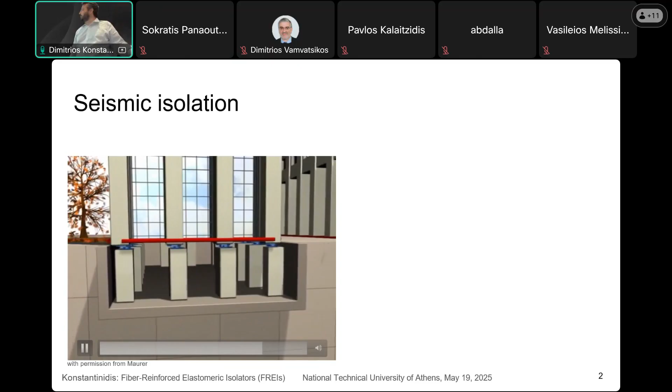So seismic isolation basically concentrates the deformations in the isolation layer, where you can use specially designed devices that can handle very large deformations or sliding.

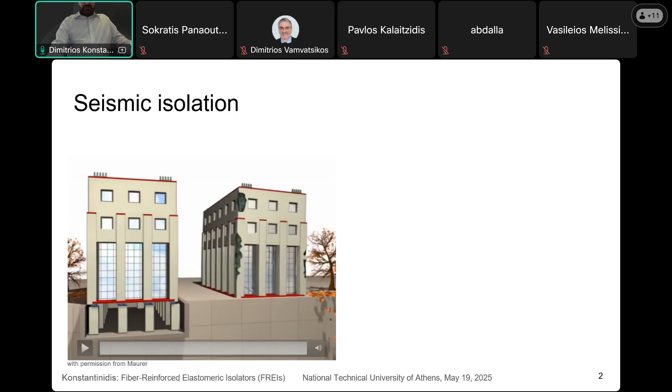Now, from the point of earthquake engineering, if you look at the response spectrum, essentially introducing that horizontally flexible layer increases the fundamental period of your structure. It also increases damping a little bit, but that's a secondary thing. Sometimes I hear people calling isolators dampers. They're not dampers. Seismic isolation is a different thing. Damping is an additional, extra, secondary thing, but it's not essential.

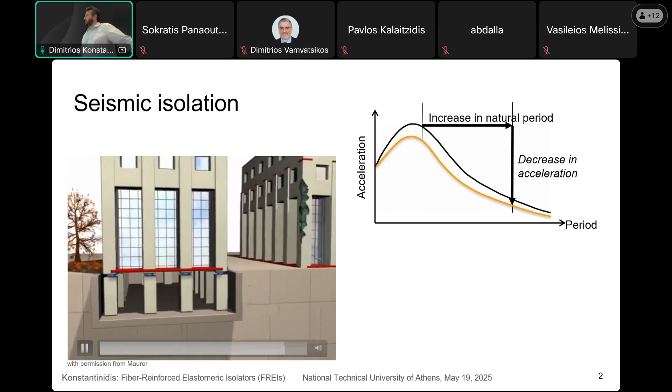Now, all this, of course, happens at the expense of increased displacements, but those displacements are again concentrated at one location where you can deal with them, as opposed to having them distributed throughout the structure and causing damage.

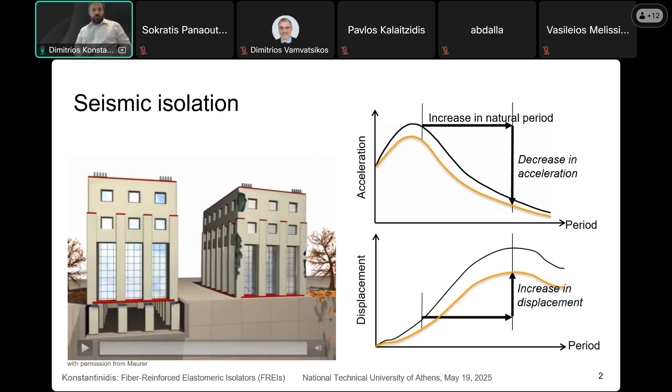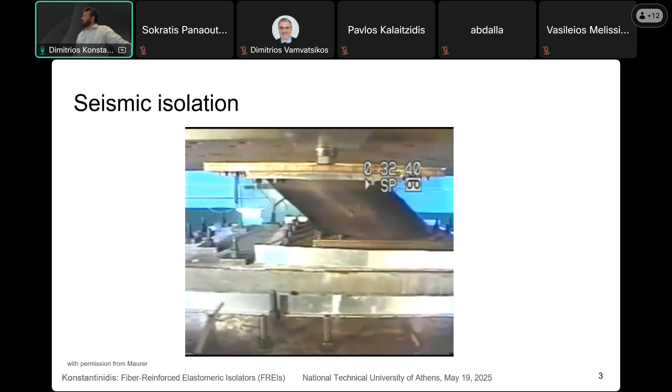Now, this is again part of the introduction. This is just a video of a seismic isolator, I think this is a lead rubber bearing. I just want to give people an idea of how much seismic isolators deform. This is a test at UC San Diego, and you see the deformations here in the order of about 300%, I believe. So 300% means that the lateral displacement is 3 times the total height of the rubber.

Now, could steel structures do that? Could reinforced concrete structures do that? No. All right.

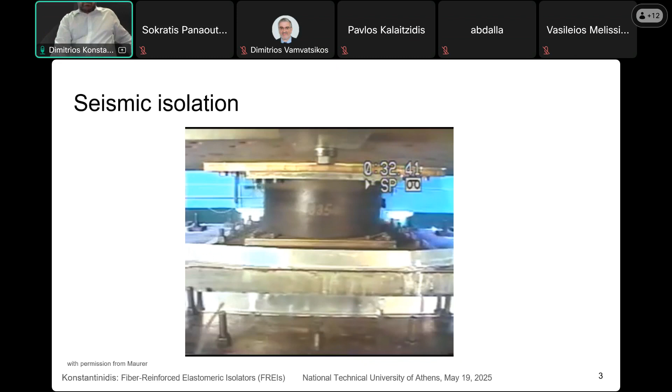Now, I want to talk a little bit about elastomeric isolators, because that is the focus of my research, has been for many, many years. This is the anatomy of a rubber bearing. If you look at it inside, it consists of layers of rubber and steel plates, thin steel plates, sometimes called shims. Then at the top and bottom of the bearing, you have these thicker steel plates that are used to connect the isolator to the superstructure and substructure.

And I'm going to talk a little bit more about that.

The issue with conventional steel reinforced bearings is that they have a lot of steel. Because steel is quite dense compared to rubber, you end up having a device that weighs in the order of 0.75 tons, sometimes up to 1.5 to 2 tons. So they're quite heavy.

Now the concern with the weight is not so much the behavior during an earthquake, but it's the construction. If you have a device that weighs a ton or more, and you want to implement it in a low-cost isolation setting, maybe in a developing country, you would need lifting equipment. But you most likely can't afford lifting equipment. So that already limits your options.

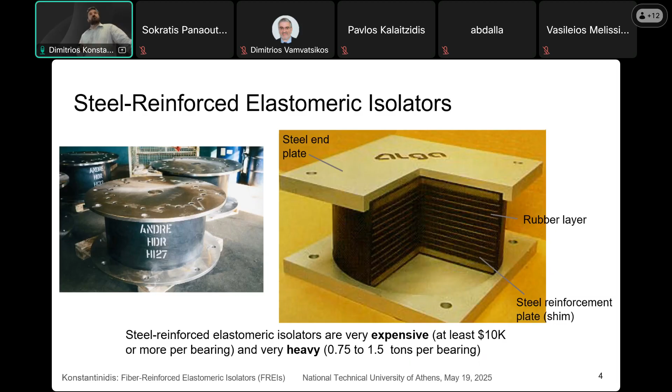So significant cost. The goal of this research in fiber reinforced elastomeric isolators is to find a way to reduce these costs. The idea behind FREIs is first to replace the steel reinforcing plates, the shims, with carbon fiber mesh, which is very light and relatively cheap in most places. Then the goal is also to eliminate the top and bottom steel end plates, which tend to be thick, typically around 3 centimeters, adding a lot of weight and cost. So we eliminate those, and there are certain implications associated with that, which I'll talk about.

The other nice thing is that you could take these bearings and manufacture them in a big sheet, a very large mat, and then just cut them to size according to your desired specifications. You can't really do that easily with steel reinforced bearings.

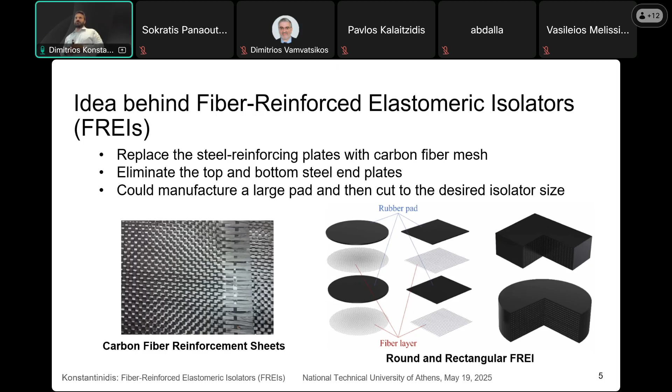So in terms of savings in weight, just going back to what I was saying earlier, for a steel reinforced elastomeric isolator, you would have to use lifting equipment, which already eliminates your options in a lot of low-cost developing world settings. On the right, fiber reinforced elastomeric isolators are so light that you can just pick them up. So the lifting equipment here on the right is Professor Jim Kelly, the father of seismic isolation.

And that's all it takes: a construction worker takes the isolator, places it where it's supposed to be, and you proceed from there.

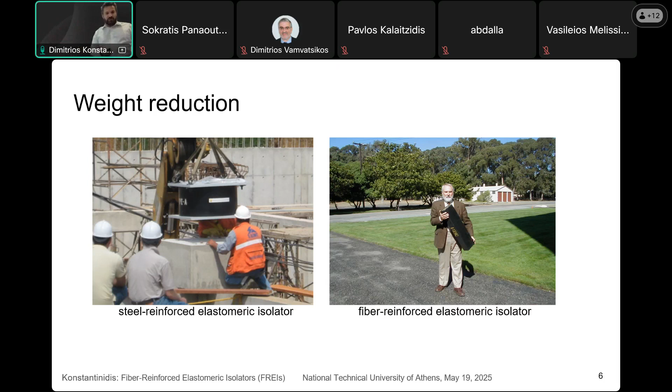Now, what are the implications of these changes we've introduced? I want to talk a little bit about the backbone behavior of elastomeric isolators. On the left, I have a conventional isolator that is anchored to the top and bottom, to the superstructure and the substructure, using anchors. Sometimes we call this configuration bonded.

That is in contrast to what we have on the right, which is a low-cost application where the isolator is just put in place, with no anchors in this case. It relies on friction to transfer the shear forces. Now this is something that has been contested over the years—how can you rely on friction? But I'll come back to that again later.

We have shake table tests that show it actually works pretty well. For a conventional isolator, assuming there are no P-delta effects—let's put those aside for now—if you shear it, what you get is just a line. It's just a spring.

Whereas for an unbonded fiber reinforced elastomeric isolator, as you start shearing it, the top and bottom corners roll off the supports, so you start losing some effective shear area. That reduction in shear area results in this softening behavior. As you keep shearing the isolator, eventually this face, which was originally vertical, becomes horizontal—we call that full rollover. And you can still keep shearing these bearings without them sliding if they're fiber reinforced elastomeric isolators.

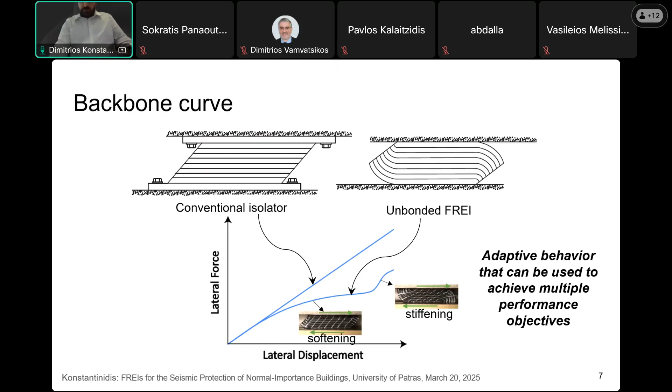So, to summarize things for now, there are various advantages behind FREIs. One is the business of the rollover effect, and you can get adaptive behavior.

Now, there is another very important implication behind this rollover deformation: when you allow the bearing to roll off the supports, you alleviate the high tensile stresses that would develop normally at these corners if these were bonded to the top and bottom, as they are in conventional isolators. It's these high tensile stresses that result in this very expensive manufacturing process. So if you don't have these high tensile stresses, you don't need such a fancy manufacturing process, and you can make these bearings for a small fraction, less than an order of magnitude. We're talking about a bearing like this being in the hundreds of dollars versus 10,000 or 20,000.

And that's for rubber bearings. Let's not talk about sliding bearings. Just as a parenthesis, I was involved recently in an evaluation of a hospital in San Francisco that was to exhibit very large displacement, 52 inches. 52 inches is something like 1.3 meters. You cannot achieve that with elastomeric bearings; you need to go to sliding bearings. But the cost of the devices was $75,000 each.

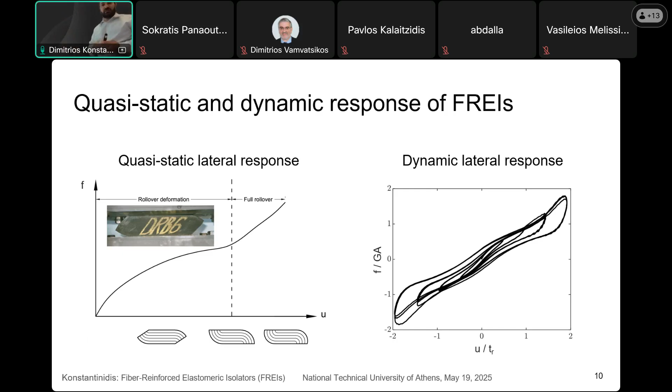The other thing that is noteworthy here is that the unloading stiffness is also a function of displacement. If you look at the stiffness, let's say over here versus here, that also varies with displacement. The larger the displacement, the larger the unloading stiffness. So it's a little tricky to try to capture all these things.

So what we wanted to do is come up with a dynamic model able to capture these traits, and we followed the approach others have followed: a combination system with a nonlinear elastic element in parallel with a hysteretic element. What is different in our approach is that our nonlinear elastic element, which captures the quasi-static behavior, is not based on curve fitting, as others have done—take data from tests, curve fit it, come up with a polynomial. Ours is mechanics motivated.

I'll come back to the implications of using a mechanics motivated, or mechanics informed, approach versus an entirely data-driven method. The other thing is for the hysteretic element shown in the middle, we wanted to capture a higher than linear energy dissipation with increasing displacement. Taking these two features together, we come up with a model better able to capture what we see in experiments.

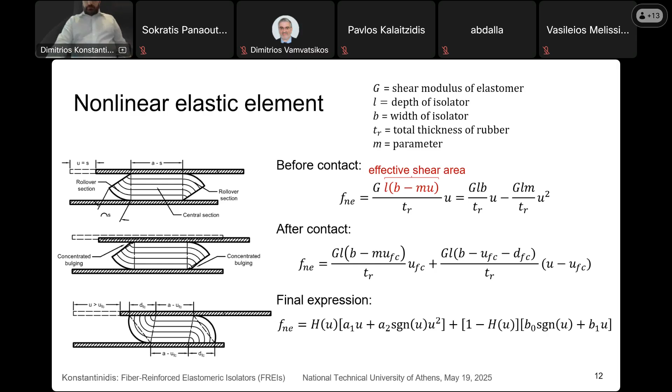After contact, experimental tests show the behavior is fairly linear, so this equation captures that kind of behavior. We then take the behavior before contact and after contact and combine them into a single equation using a soft Heaviside function H. That's for the quasi-static behavior.

For the hysteretic element, we use a variant of the Bouc-Wen model, specifically a simplified version of the Baber-Wen model. This one accounts for stiffness and strength degradation, but contrary to how it's normally used—say for reinforced concrete, where increasing displacement gives reduction in stiffness—in this case we see the opposite: with increasing displacement we see increased post-elastic stiffness and unloading stiffness.

So this is a pivot-based Bouc-Wen model, and maybe you've seen this before, maybe not, but beta, gamma, and N are parameters—I know some of you have seen it very much—these parameters control the shape of the hysteresis loop. Eta is a key parameter relating the unloading stiffness to the initial stiffness.

This model tends to capture the behavior we want, which is that energy dissipation is not a linear function of displacement but something larger than linear. Another interesting feature is that if we set N equal to 1—owing to Professor Charalampakis and Koumousis—there's a closed form solution, which significantly reduces computational cost rather than solving this in a state space setting. We're not forcing it just to be more efficient; setting N equals 1 actually agrees very well with experimental results.

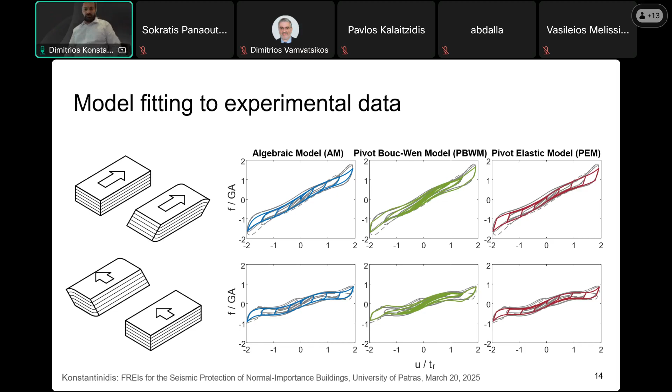But looking at hysteresis loops alone doesn't tell the whole story, so we wanted to also look a little bit at effective stiffness. Effective stiffness is a key parameter used in the preliminary design of seismically isolated structures, and typically also the effective damping ratio.

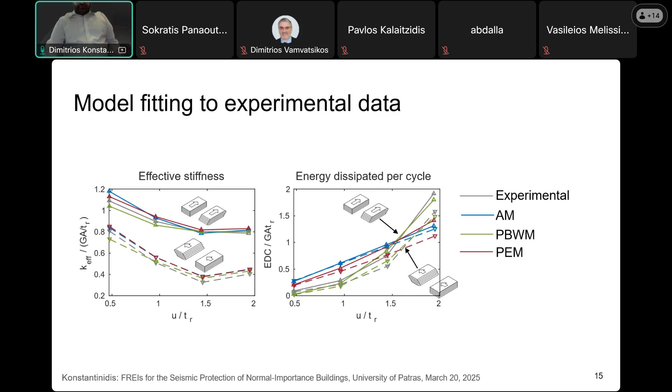Now, what are the consequences of that? Who cares? So that's what we wanted to explore next. We embarked on this case study, this investigation that involved response history analysis of a few different isolated structures.

We're looking at structures that vary from 1 to 4 stories, simple shear buildings, nothing fancy here. The isolation system is the same for all 4, because it has a period of 1.61, a little bit on the low end, but it's okay. For something like this, if you look at the nominal period of the superstructure, it would work pretty well.

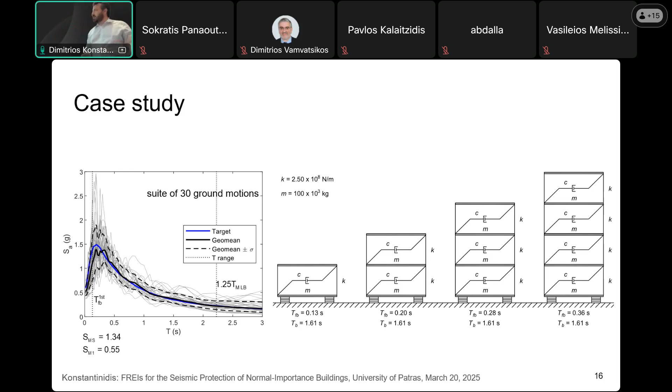So we have these models, and then we use a suite of ground motions, far-field ground motions specifically. We scale them over this period range here, which is what is recommended by ASCE 7-22. We wanted to see what are the implications of using different modeling approaches for the isolation systems while keeping all other things fixed. What are the implications of our modeling assumptions?

First I'm going to focus on isolation layer displacements. On the top I'm looking at the behavior under what is called MCE, used in the European context, or using a scale factor of 1.5 -- that's the case in the US too. The difference between MCE and D is a factor of 1.5. And then the design earthquake used to be called the design basis earthquake.

I'm looking at displacements normalized by the total thickness of the rubber, so that's kind of like a shear strain for these devices, at these 2 different levels. What we observe here is when we're looking at...

Let's look at the top graph here: the displacements that we're obtaining, the mean displacements, which is the black bars here, are larger for the green, which again is the proposed model. So the responses obtained with the proposed model are larger than what we obtain with the other 2 existing models. Why does this happen? The effective stiffness is the same. The EDC at these levels of displacement is actually supposed to be smaller for the proposed model than the existing models.

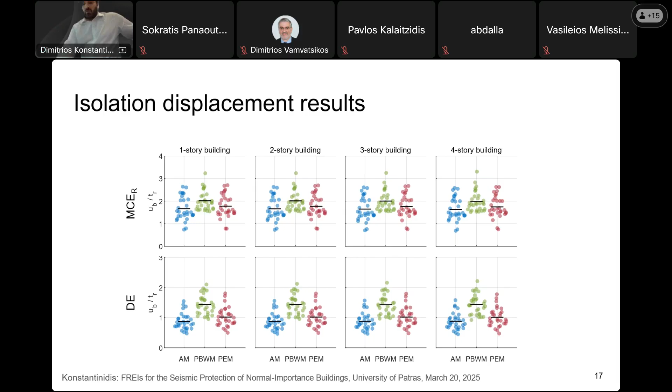Now, what are the consequences in terms of base shear?

If you're looking at the design earthquake level, we said we have larger displacements, so it would make sense that you would also have larger base shear. You see that agrees with what you see here.

But when you're looking at the MCER level, you get base shears that are similar across the board. So what's happening here? Why does this occur? Because the effective stiffness is evaluated for the largest earthquake, I think.

Well, what happens is that the stiffness you use in the quasi-static model, the nonlinear elastic model, is obtained using regression, curve fitting. And this is response history analysis, so you're going to have some weaker earthquakes, some stronger earthquakes. When you get to the stronger earthquakes, you end up getting displacements that are larger than what you calibrated the model with. And because you're using a model based on a polynomial, typically of the 5th order, you get this very aggressive increase in force.

And that very aggressive increase in force translates to these really large responses here. These are outliers, they're not real. They're purely consequences of the modeling approach you're taking. So what you see here between the existing models and the proposed model is that the proposed model has much smaller dispersion in the response compared to the others.

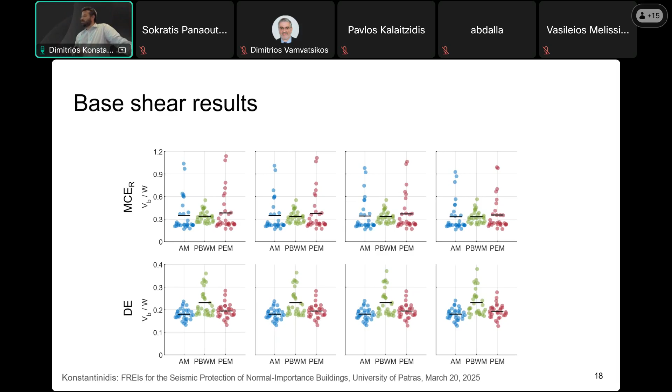Now, how about floor spectra? Floor spectra are very important in the design of non-structural components. What happens here and how are modeling assumptions affecting the floor spectra? In an isolated structure, you get typically this large peak associated with the first mode, but it's not something to worry about because there are very few non-structural components that are that flexible. So you don't really worry so much about resonance at these large periods. Most non-structural components tend to be stiff, so they're in the short period range.

And in the short period range here, you see these spikes that develop in the floor spectra, and those spikes tend to be right around the second mode. When you're looking at the existing models, those spikes are accentuated compared to the proposed model. Again, the reason is because you have all this extra unnecessary damping at low displacements. Professor Kelly earlier noted that if you have large hysteretic damping in an isolated system, what that does is it decreases your isolation layer displacement, but all this happens at the expense of the superstructure response. You get larger drifts, larger floor accelerations, and larger spectral accelerations in your floor spectra at the short period range.

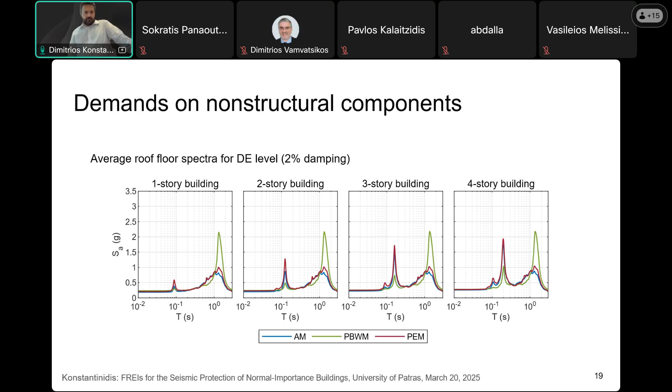So just some takeaways from the dynamic modeling study that we conducted here. We developed a phenomenological model for unbonded bearings. The nonlinear elastic element of this model is physically motivated, not based purely on curve fitting. Unlike existing models, this model is able to capture energy dissipation over the entire range of displacements. The proposed model predicts significantly larger isolation system displacement compared to existing models. That's important, because the stability of the isolation system depends on those displacements. But also a nice feature is that it does not artificially overestimate in-structure acceleration demands on non-structural components.

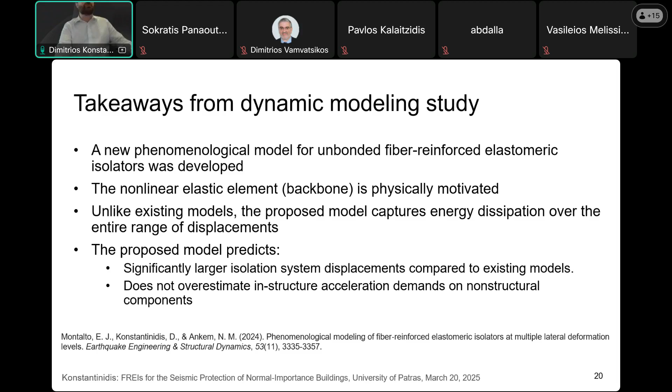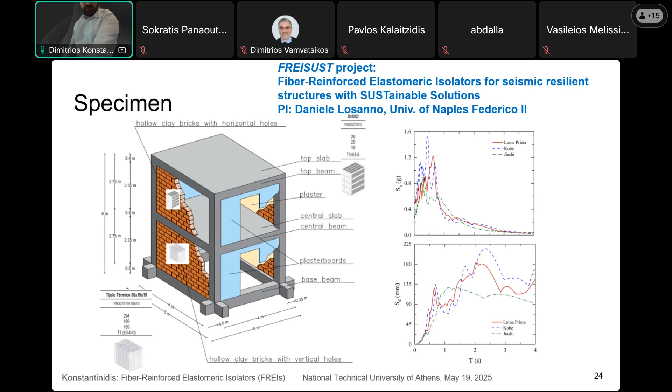And this is a picture of what we tested. It had infill masonry in one direction, it had plaster boards in the other direction. And here are some of the details. I think I'm going to skip the input motion details, maybe focus a little bit on some of the results.

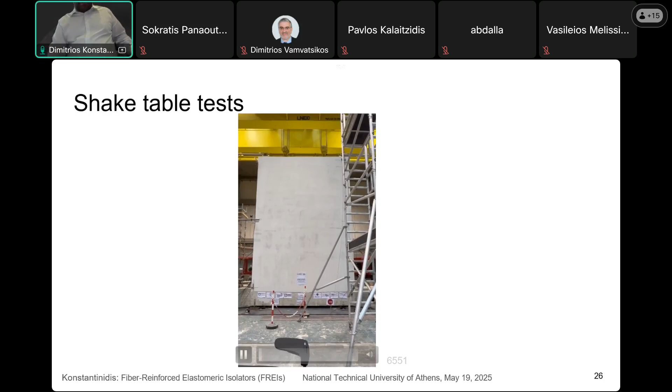But what happens is, to achieve that, all the action is happening at the isolation layer. So the isolators have to work hard in order to decouple the motion of the ground from the earthquake. So this is a fiber-reinforced elastomeric isolator, and you see the kinds of deformation it experiences, the rollover, and the input here is triaxial.

So this is a Kobe motion at 100%. And then I'm going to show you this particular bearing was the recycled rubber one. The next one is the virgin rubber and carbon fiber one. This is the strongest test we ran, at 120% scale, same motion.

Extremely resilient devices considering their cost. We're talking about a few hundred dollars. Now there's always concern about these things sliding and jumping and doing all kinds of things, and understandably so, because they're not bonded to the superstructure. So that's something we looked at, and I'll give you some of our observations in a second.

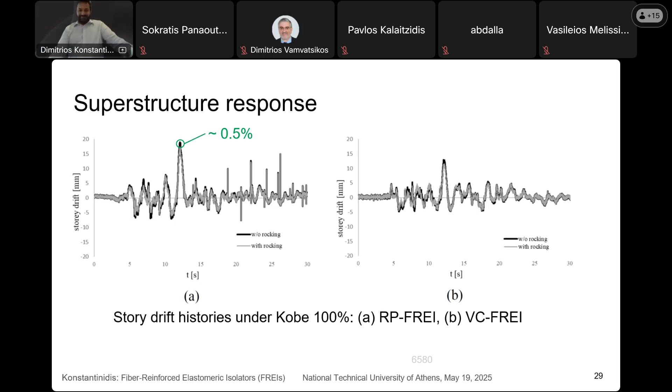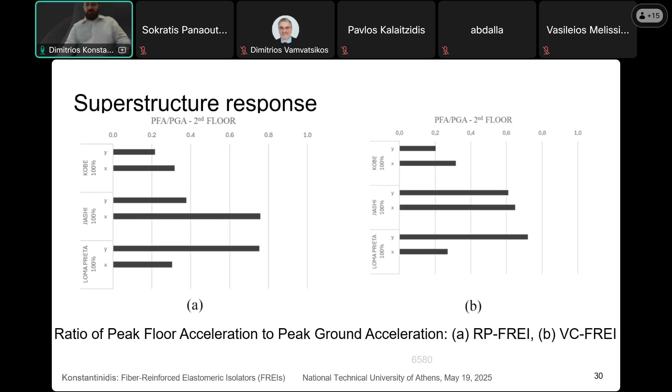Main observations from the shake table test: no structural damage was observed. Peak story drifts are in the order of 0.5% or less. Peak floor accelerations are less than 0.75 PGA. No visible damage to the non-structural components and contents. The masonry, infill walls and plasters, the stucco, everything was completely intact. There was a little bit of sliding observed for some of the desks, but very small, in the order of half a centimeter.

Then we tested two types of bearings. The recycled rubber bearings experienced no damage, but they had a little bit of distortion after the tests. Part of that distortion recovered after a day. The virgin natural rubber carbon fiber bearings had only superficial damage because as they were deforming, they came in contact with some sharp steel corners. But other than that, they did really well. There was no internal damage at all.

Shifting gears, the last thing I want to talk a little bit about here is the stability of fiber reinforced elastomeric isolators. And what do I mean by stability? Well, because these are part of the load carrying system, they're essentially like columns, right? So you need to design and make sure that they are stable under dead and live loads. But also in an earthquake, you need to make sure that they are stable under very large deformations, while also being able to carry the weight of the superstructure.

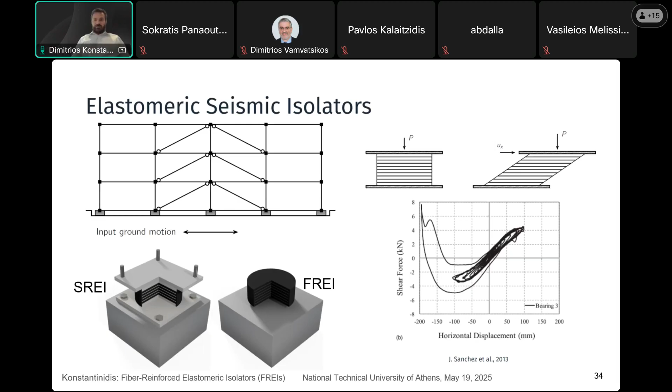So I wanted to give you a little bit of context about the stability of conventional steel reinforced elastomeric isolators before talking about FREIs. The approach that has been taken is to use a 1D beam element and to assume that there is shear deformation in the cross section, but there is no warping, so plane sections remain plane after deformation. An important assumption, based on the theory developed by Haringx, is that the axial force, the normal force P, acts perpendicular to the deformed section. It doesn't act along the elastic axis, but perpendicular to the deformed section. And that gives a much more accurate prediction of buckling loads compared to the Engesser assumption.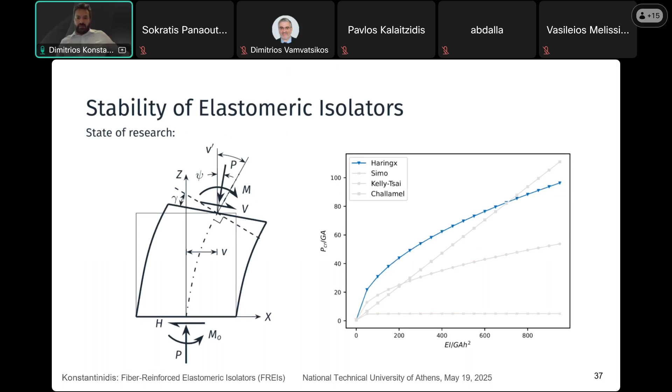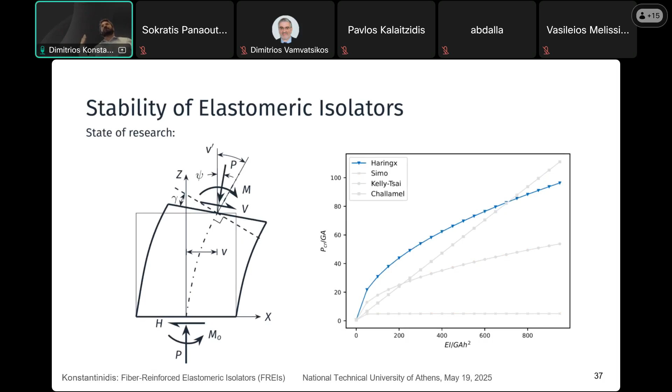So we set out to try to come up with something new now. For the time being, what people assume in the absence of a better theory is that Haringx's theory is appropriate for fiber reinforced elastomeric isolators. Is it? I will come back to that.

What we wanted to do here is to develop a theory that enables closed form solutions for the critical load of these bearings, of fiber reinforced elastomeric isolators. But we also wanted to bypass some of the issues that I mentioned. So the approach was to treat the bearing as a 1D element, because that's really what we can handle analytically.

But to start with using a 1D rod rather than a beam. Essentially the difference here is that when you develop beam theories, there are some underlying simplifying assumptions about the deformations, displacements, or rotations, typically one or more of these is small. That allows you to come up with a relatively simple formulation. A rod doesn't have any such limitations, so it can be much more general. That's what we wanted to start with.

Here I'm showing you the deformation field associated with the 1D rod over here. And this component here is really what is key in terms of the warping deformations at the cross-sectional level. We have a warping function W, and we have an amplitude function alpha that is associated with that.

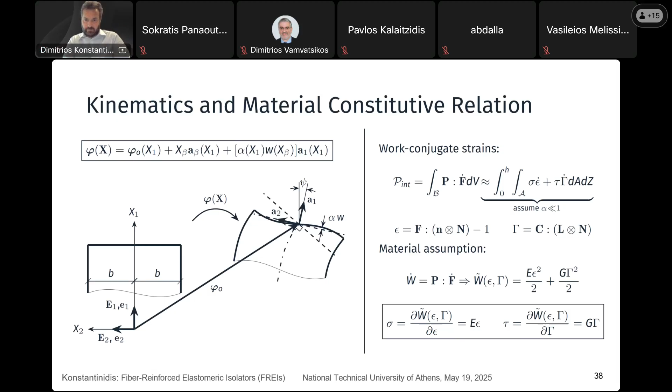Now, once you have these, we can proceed using a stability criterion to come up with the critical load for these devices. Essentially what we're doing is we're taking the linearization of the virtual work relative to the equilibrium configuration of the rod, and we're doing it here to start with under pure compression, no lateral offset. Essentially what we're trying to do is we take that, we set it equal to 0. That gives us the condition under which the stiffness becomes 0, basically when the equilibrium bifurcates.

So once we do that, and of course here I'm skipping a lot of algebra, a lot of math, we come up with this equation here for P bar. P bar is a normalized load. And if you solve this equation, which is a quartic equation, you can determine the P critical.

That's nice, okay? But as a practicing engineer, I want to use something simpler. This is a quartic equation, it requires iterations. And the other thing is that embedded in this equation are 4 warping functions, or warping parameters, that you have to compute through integration. It's quite involved, so it's not something a practitioner wants to do.

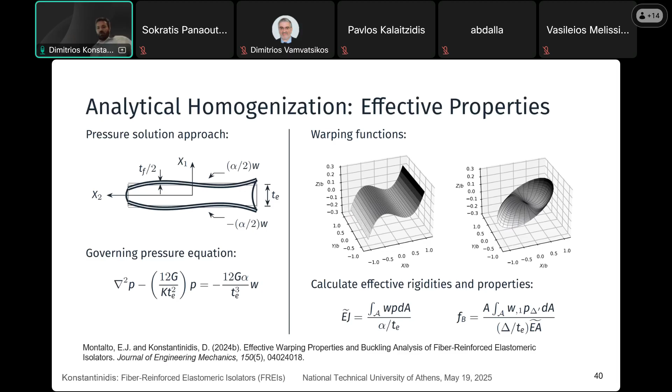Now, is this theory an improvement? We compared the predictions of our theory against very high fidelity FEA results that we have. We've been doing FEA of rubber bearings for many years and acquired quite a bit of expertise. So we consider those our benchmarks, and we compared against them using this new theory, for different geometries of bearings: square, circular, and annular.

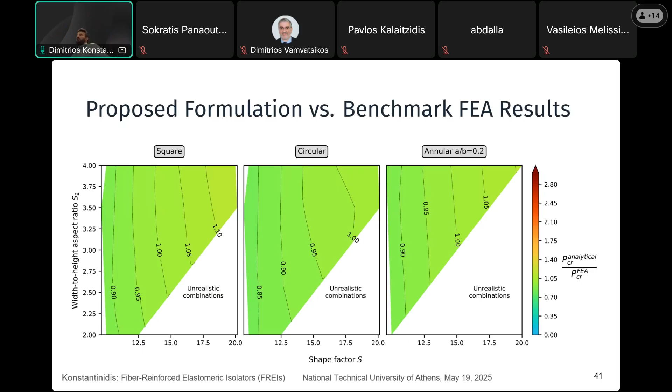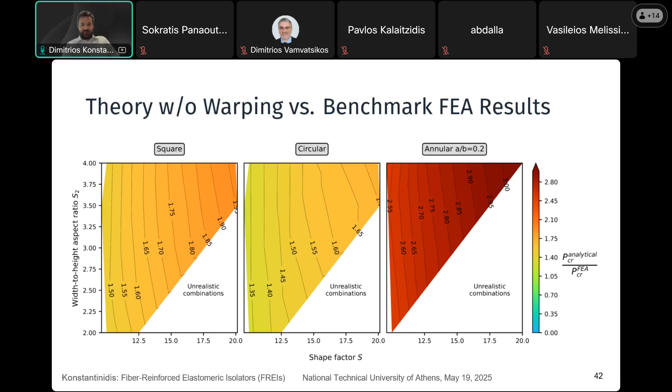Okay, I'm going to fly over some slides here because we're out of time, I think. The next step here was to consider the coupled behavior of lateral and vertical. Seismically isolated devices are supposed to experience very large deformations.

How is the stability of these devices affected by those deformations? We wanted to not just look at fiber reinforced elastomeric isolators, but go back and revisit this assumption that's been floating around since the inception of steel reinforced elastomeric isolators, that the steel is rigid. Is it really rigid? We wanted to go back and look at that.

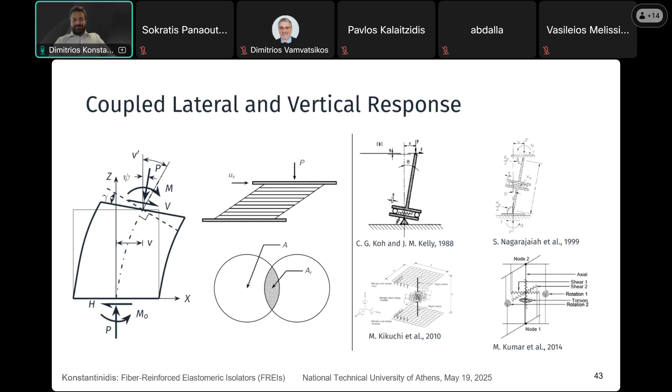I don't have time to go over this, and maybe it's okay because this hasn't been published yet. But the idea is we wanted to extend our theory. The mathematics and the computational effort becomes very, very large. So we took a slightly different approach, a multi-scale approach, where we have a structural element representing the isolator, but within that element, this is a macro scale model.

We have a mesoscale model, which is a unit cell, where we try to capture the mechanics of what happens there. Ultimately, the goal is to come up with a model that can be used in response history analysis, nonlinear response history analysis. But the computational effort involved in the mesoscale unit cell is really, really quite involved still, so you cannot do it on the fly in real time.

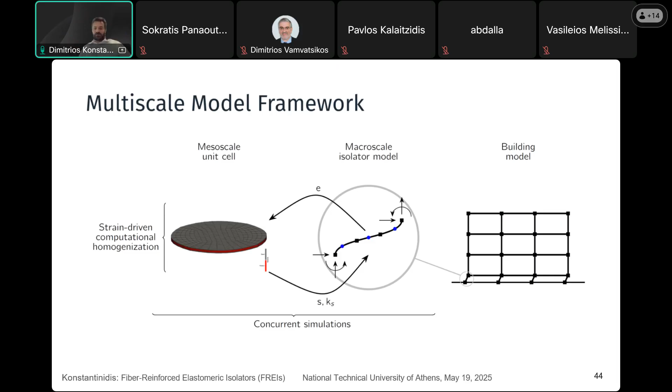So the idea then was to come up with a surrogate model, where we do a lot of analysis offline. We come up with a solution space and then have an offline database that we can use to train the model to come up with predictions of the behavior of that unit cell.

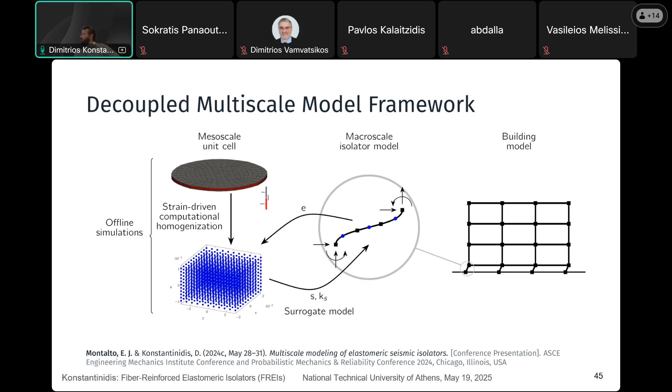Skip the math here, this is about the training of the model. But essentially, let me show you just a couple of results here. This is now trying to compute, and this is going back to the idea where we also want to test the assumption that's been floating around about conventional steel reinforced elastomeric isolators. So this is a bearing under compressive load, and we're considering a lateral perturbation.

This is a very, very small fraction of this. Basically what happens is you apply some loading and then suddenly the bearing buckles. And you see that our prediction, which is this multi-scale with warping, solid line, closely aligns with the predictions of the benchmark finite element analysis.

If we don't consider warping in our multi-scale approach, looking at this, then we're really overshooting the critical load. And together with this, I've also included the state-of-the-art model that's been out there by Kumar and Konstantinidis, and you see that this is also not able to capture it accurately. It really overpredicts the buckling load.

So it's highly unconservative. Now, a couple scenarios here. This is the case where I'm considering both lateral deformation and vertical load, with two different vertical loads, keeping this ratio P to P critical at 0.3 and then 0.7. What you see is that for lighter loads, 0.3, all the models are able to capture the behavior fairly okay. But once you get to large critical loads, and in a dynamic analysis, you can get to large critical loads—it's not just your nominal, your service level loads.

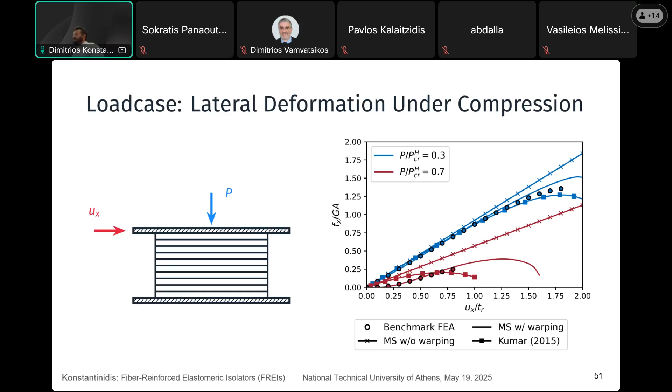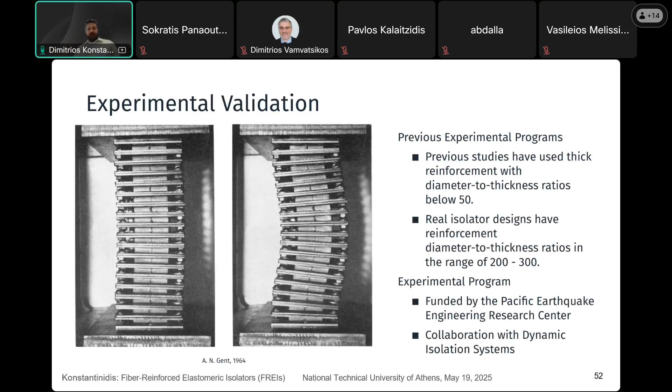Okay, and what are we doing next? We're doing tests, okay? This is all beautiful, but without experiments, we can't really validate it. So the next step is to do some component level testing to see what the behavior of the devices is at the component level, to be able to validate and calibrate our models.

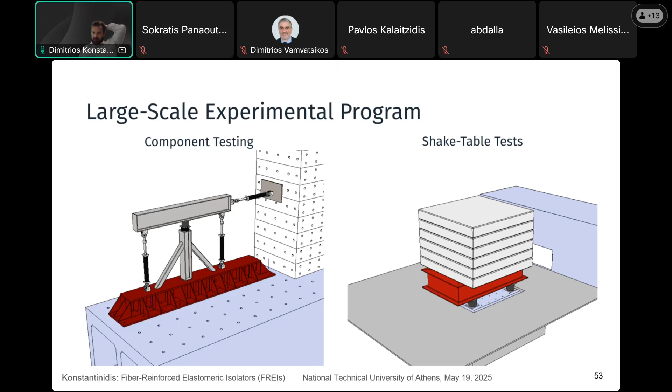But also we're going to do some shake table tests because we want to see what happens at the system level. Like, okay, maybe one bearing buckles, becomes unstable—what happens to the system? Does the system become unstable? So we want to kind of explore these things. We're going to be doing this over the next few months at Berkeley, at the Pacific Earthquake Engineering Research Center, shake table there.

Okay, so I think that's it. Ongoing and future inquiries.

We're still working on the stability of FREIs. We're looking for ways to reduce lateral stiffness, basically increasing the seismic isolation efficiency. We want to see how high we can actually go.

Again, these bearings are not bonded to the top and the bottom, so at some point you're going to have issues with uplift. So when does that happen? In the test we did at LNEC, if I remember correctly, we went to a PGA in the vertical of about 0.6.

You're not just concerned about jumping, but about the fact that you have friction. As the normal pressure becomes lower, you're concerned about sliding. But rubber is an incredible material — it doesn't abide by Coulomb friction. There's a lot more friction there than Coulomb predicts.

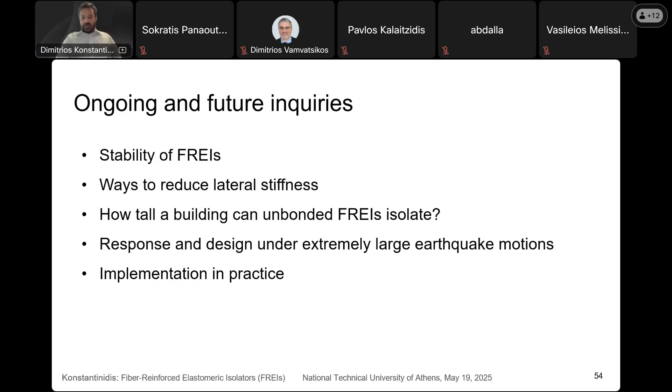We're interested in looking at the behavior of these devices and structures using them under extremely large earthquakes. And last but probably the most important thing: implementation in practice. There's quite a bit to be done before we get there with confidence, but we're hoping to be there at some point.

The last thing I want to do is acknowledge my PhD students. These are pictures of my students at Berkeley, past and current. But the person who has been the most instrumental in the work I presented today is Eduardo Montalto, so I wanted to acknowledge his work. Eduardo has accepted a position at University of Colorado Boulder — he's going to be starting there in January. I'm sorry for going a little bit over time.

I'm going to stop here and see if you have any questions.

I have to start with it — how does that buckled bearing look like? Does it look very stocky? I can't really picture it. It doesn't deform very much in the vertical direction, but it just goes like this and then it starts moving to the side. We have done finite element analysis where you can actually visualize that — I can send you some pictures.

Buckling bearings — not fiber, but conventional bearings that are bonded top and bottom — have this very peculiar theoretical behavior, which Michalis knows about since he studied them during his master's at Berkeley. Theoretically, they can buckle under tensile loading. In practice, you get other issues — you get cavitation with the rubber, and other things happen.

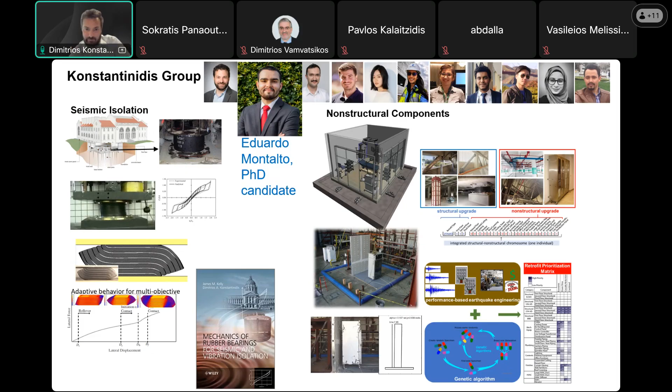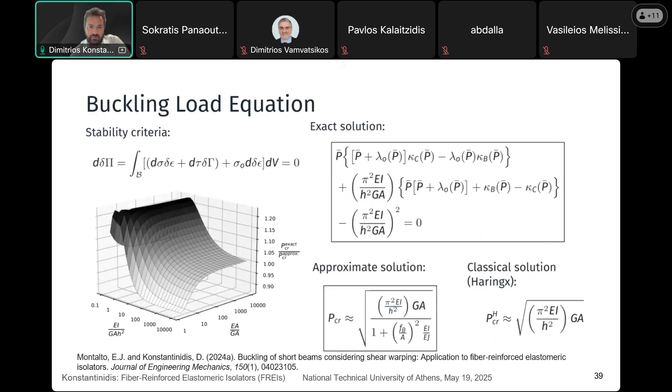So the damping is less in this system in order to have larger displacements. First of all, the damping in the proposed model is more accurate, in that you have less damping at low displacements and larger damping at higher displacements, whereas the existing models are the opposite - they're basically linear with displacement, which isn't really what we've seen from experiments.

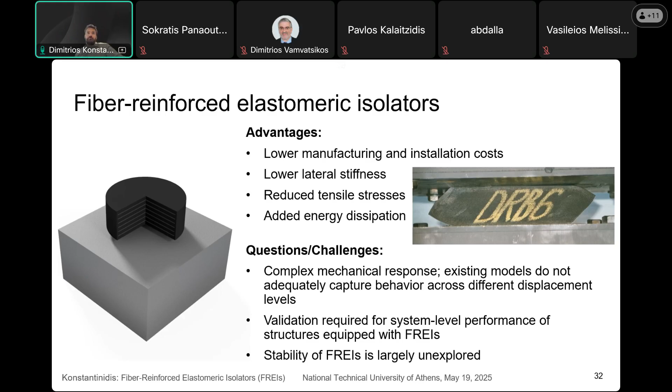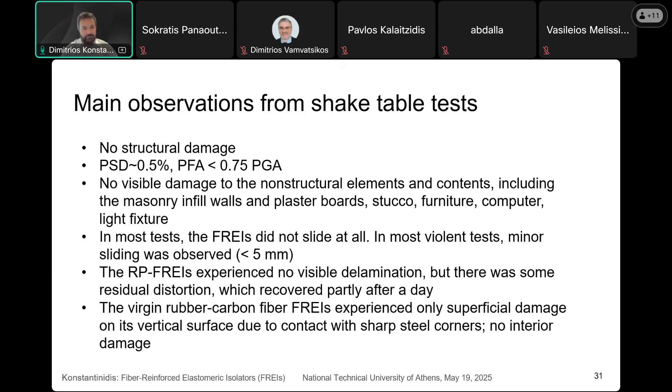Where you have a pivot point, and this is actually a problem during hysteresis, because for the reinforced concrete case, it predicts stiffening if the experiment shows the opposite. So there's a pivot parameter that guides these points.

The position of these points is calibrated - calibrated experimentally, yes, this is a phenomenological model. It's inspired by mechanics, but you still need some kind of experimental results to calibrate, especially the hysteretic part of it.

So the idea behind this is that basically when you get this unloading behavior, everything is kind of, if you extend these unloading branches, they go through that point.

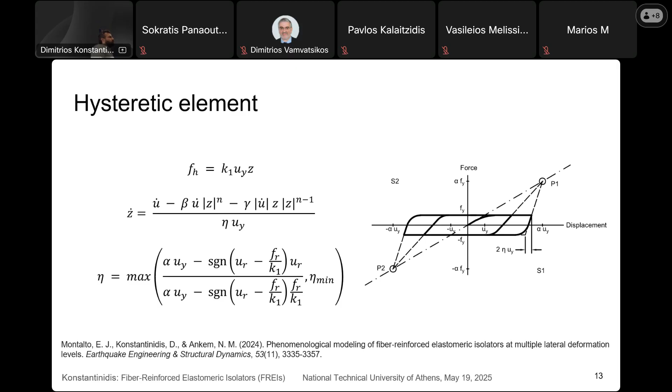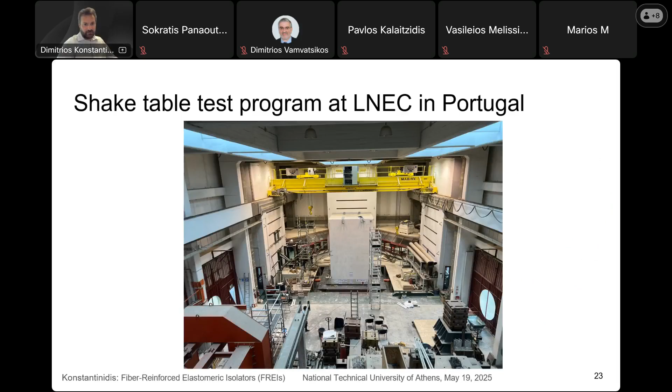Αυτό είναι κυρίως θέμα κόστους, αλλά το κοιτάξαμε κιόλας σε αυτά τα πειράματα. Μισό λεπτό να σου δείξω. Αυτά τα πειράματα που κάναμε, τα κάναμε στο LNEC. Κοιτάξαμε δύο configurations.

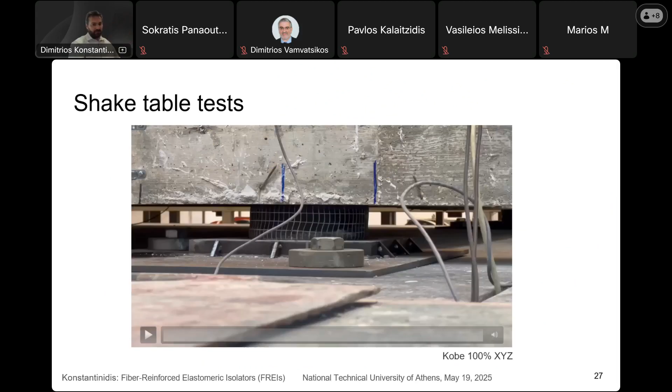Το ένα είναι που τα bearings δεν έχουν καθόλου restrainers πάνω και κάτω - είναι αυτό που βλέπεις εδώ. Και το δεύτερο έχει αυτό το restrainer που είναι σαν μια μεταλλική... δεν είναι κολλημένο, αλλά δεν τα αφήνει να γλιστρήσουν. Είναι χωρίς το λάμι της ενδιάμεσης, γιατί αυτό το παίρνει, δεν έχει λάμι. Δεν ξέρω αν αυτό είναι καλό.

Νομίζω δεν είναι καλό να το κάνεις αυτό, γιατί μετά, άμα τα κολλήσεις, θα κυνηγάς την ουρά σου, γιατί θα ανεβούν τα tensile stresses και μπορεί να κάνουν debonding μεταξύ του rubber και του fiber. Αυτό το πρόβλημα το έχουν τα laminated rubber bearings, αλλά εμείς θέλουμε να το αποφύγουμε, γιατί είναι πολύ ακριβό να τα κάνεις bond. Θα βοηθούσε να βρουν application.